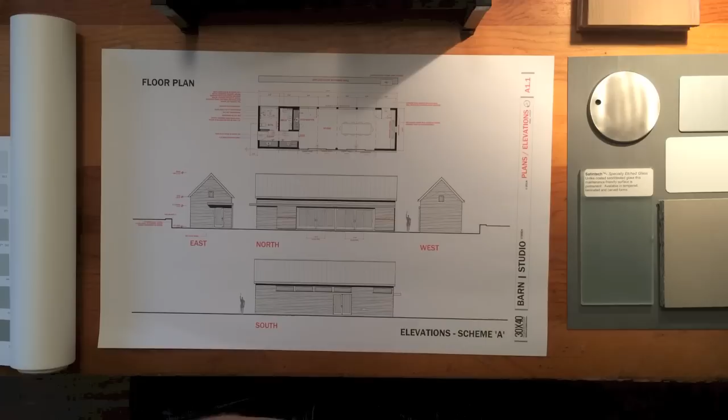The first stage of the design process, we set about designing the floor plan - you can look back at the previous video for details on that. We've essentially settled on a floor plan they're pretty happy with. There are some minor plan tweaks that have happened; we flipped it end for end. This is part of the normal back and forth process, working with the client, giving them information, they react to it, and we go ahead and revise the floor plans.

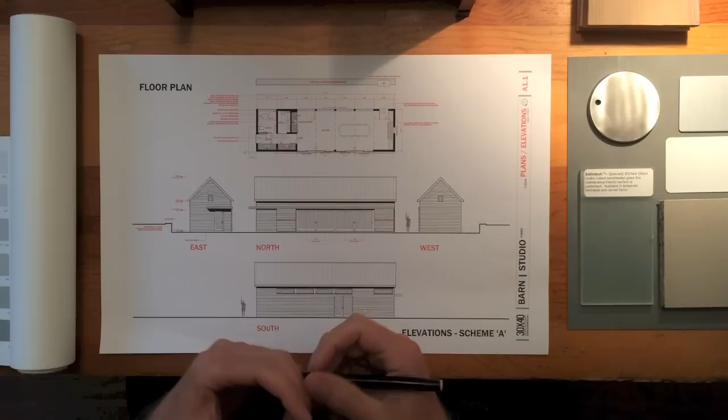The next step, even when we're initially designing the floor plan, we have some sense for what the building looks like. We knew it wanted to be a simple shape, and we also wanted some suggestion of the more modern interior on the exterior. We've developed this flat roof canopy as a way of expressing some of the more modern tendencies of the inside on the exterior shell of the building. We can't be too overt about it because there are bylaws in this subdivision that prevent us from using flat roofs as a major gesture on the exterior.

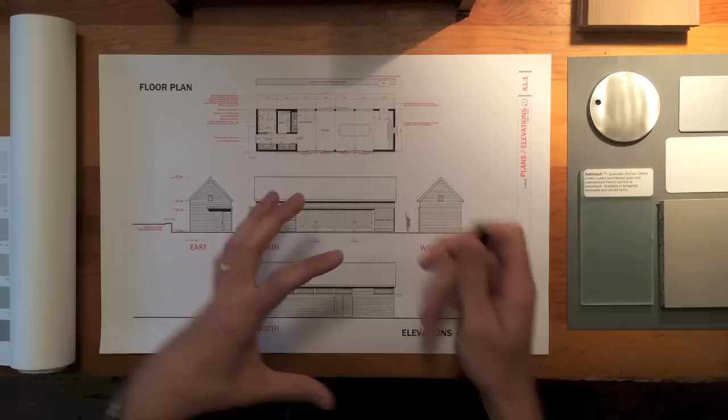One of the things we do once the floor plan is set - we know in general where the spaces are, what their relationship is to the landscape and the sun patterns. This is the northern side of the building, this is the southern side, and we know how the sun is moving, and generally how the client wants to use the site. Once we know those factors, we can really start figuring out what the exterior of the building is going to look like.

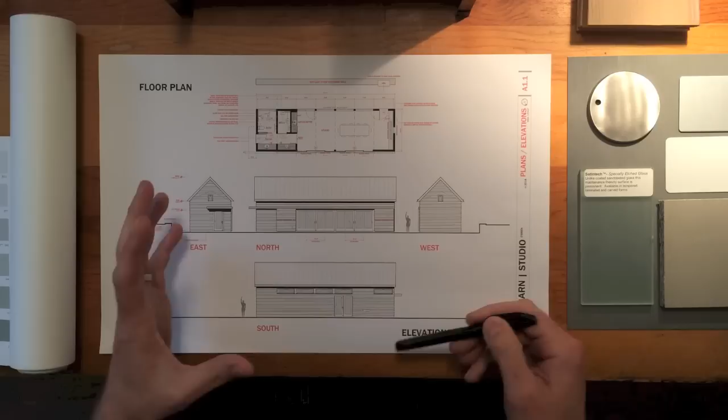When we design the elevations, which is what you're looking at here, we really start thinking about what the openings are. In order to do that, we think about what spaces they're serving. The big gesture in this floor plan is obviously the studio - it makes up the bulk of the floor plan, and has a very public relationship both to the entry area of their house and to the site, linking the interior of the studio to the exterior space. So obviously that's where our big gesture wants to be.

There are a couple of things to consider here. Obviously we have to be thinking carefully about the budget. Every project has a budget, and when we talk about big openings - if I can just sketch this big opening here for you - this is about a 50-foot building, just to give you some idea, and the eave height, which is this point here, is about 10 feet. You can see our little scale person here. That 10-foot spot sets the eave height, which sets the height of the building in general, the proportions of the building. You can see this big opening here, if we just sort of color that in.

That's very barn-like, and that's part of what we're working with here - this is the design aesthetic we're working with. Now, when we think about those big openings, everyone always wants to be able to open this space wide up. When we're designing these big industrial type spaces, it's a studio space, you want to be able to move your tables and chairs and have a clean flow between interior and exterior of the space. The problem with that is these size doors - if this is a 12-foot opening, from here to here, that's a 24-foot overall opening.

That's a large door, and a lift slide door that could accommodate that opening is about $1,000 per lineal foot—that's about $24,000 worth of doors in this one wall alone. So we have to think about how to make this feel open, feel connected to the landscape, but not spend $24,000 doing it. That's the challenge with this main elevation.

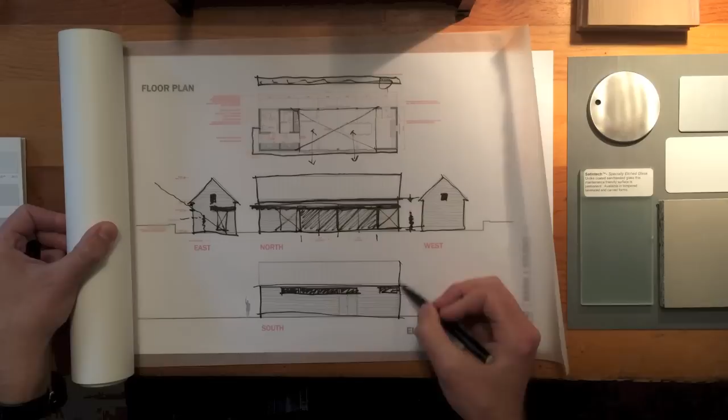In general, we presented the client with 5 different options. I'm showing you 2 here because I think these are the 2 strongest ones.

The large sliding doors we talked about in the beginning of the video—in this particular configuration, we've opted for a French slider where the middle 2 panels slide to the side, and the overall opening is 12 feet. When you open the 2 sliders, you're left with roughly 6 feet, so half of that opening. So you have a large 6-foot opening here and a large 6-foot opening here.

Now that's not quite a barn feel, so we wanted to explore what it would take to get more barn, a much larger opening there. This option looks at doing that. We went to a different door manufacturer.

These are actually commercial door frames, adapted for residential use, but essentially the frame comes knocked down—they call it KD. The frame is assembled in the field. The sashes are shipped fully glazed, and you pop the sashes into the frame you assemble on site. This saves some money—it's more of a commercial system, and thus we can get larger openings.

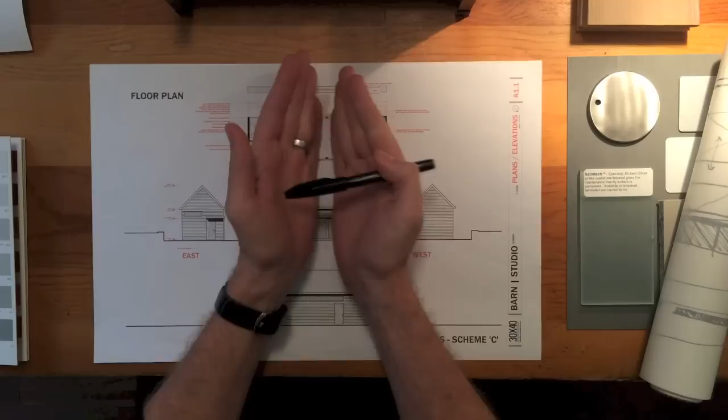In this particular one, you can see this line indicates that this entire 6-foot side and this entire 6-foot side of this opening are stationed in the center so they'll both slide to the side. That leaves us with a full 12-foot wide opening, or the perception of one. Of course, we have some structure in the middle of that, but to us this is a much more barn-like feel. Opening the center of this space up really allows you to move more freely in and out of this space.

And then we started looking at some of the other spaces—we have a mechanical space here, a bath space. The bath is in general a private space, again sitting on the south side. It made sense to locate a clerestory window up high in that space, and we actually tucked one around the corner here as well.

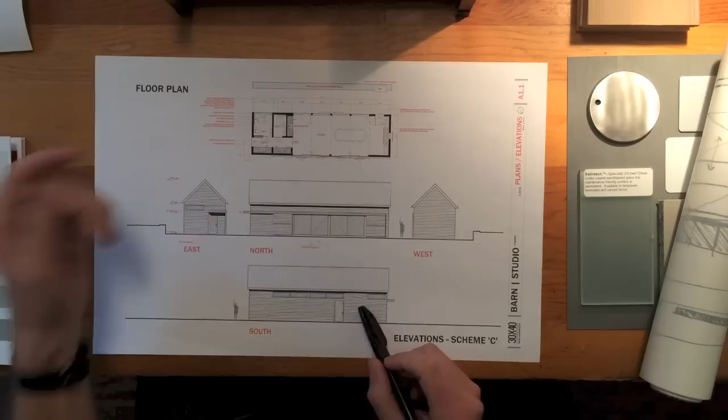And we'll solicit the client's feedback and figure out what they want to do about that.

The last thing to mention in this scheme is this solid door that leads out to a cooking area, and you can see the grill. We've got different options for where this door could be in this wall. Does the grill fall here, or here? It should be related to that door. When we put the door more in the center of the plan, it allows a stronger relationship to the interior kitchenette and more direct access to the grill area—it just made sense.

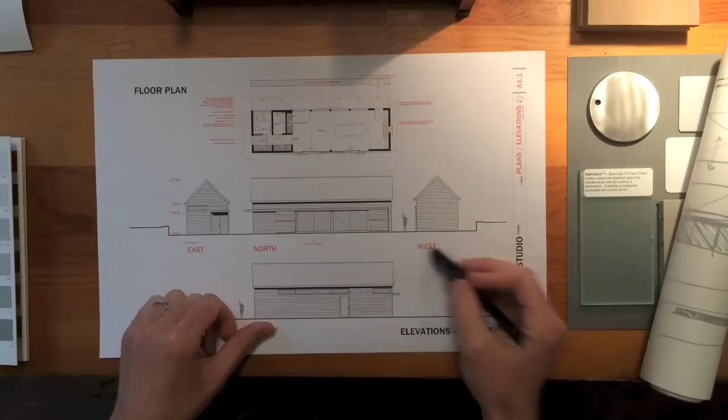In this case, it's solid, so that this whole north face is a more solid piece. The south face is completely open, and yet on the north face we still allow some light in from above. This face has no windows in this particular scheme. The previous one, remember, has a small window. This faces the street side.

We really wanted to go with a real austere face, like a shed piece, and then as you arrive to the site and come in, you sense, oh wow, this is actually a fairly large open studio space.

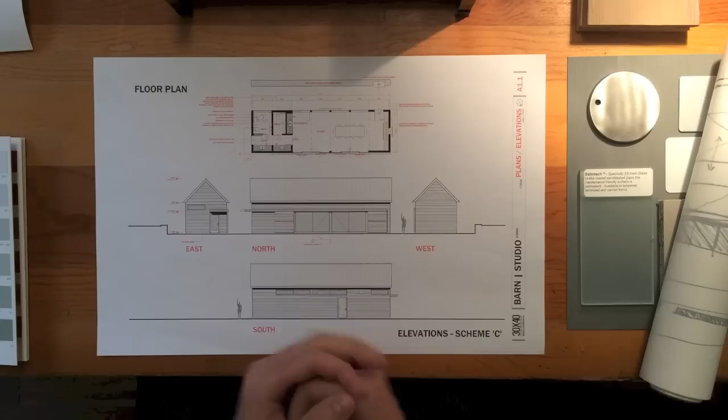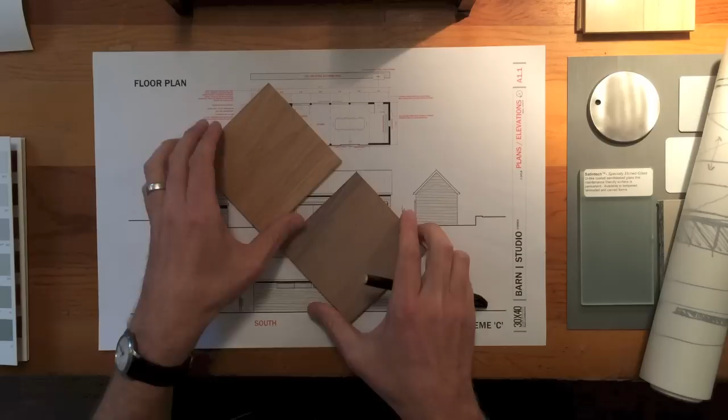The sliding panels is the last thing I'll mention here. They stack to completely conceal this, so when the building's not in use, you end up with a screened face. Depending on how we design and build these panels, they can be slats so they provide some screen. If we put a space between these boards, they can provide a sunscreen on the south face and modulate the amount of light coming into this space, as well as make it look like a completely closed building when totally closed.

So that's the evolution of this piece. The one last thing I want to mention is a proportional game we played, and it's a dialogue we're continuing to have with the client.

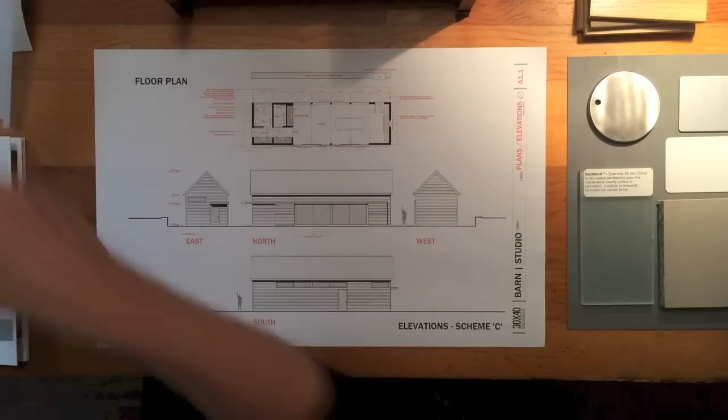One of the things they requested was they didn't like the idea of having a 7-foot door. They felt it felt cheap, lower quality for their home, and their main house has all 8-foot doors. Here's where I fell on that. Remember, this is the 10-foot eave line, and this is the 0-foot lower level plan line.

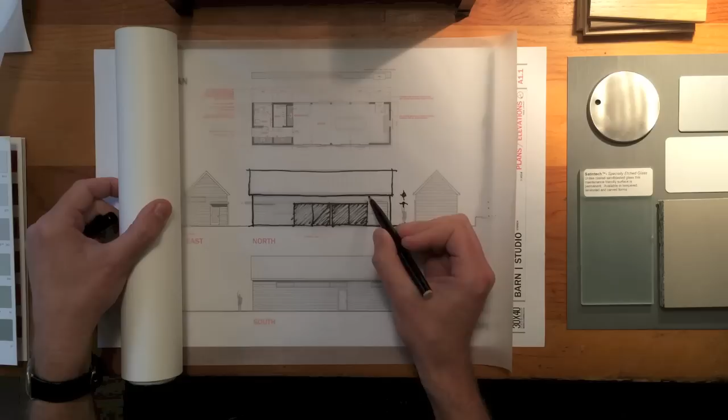I recommended against that, for this reason. These doors here are shown at 7 feet—these are our big monumental sliders that move out of the way to create that real barn-like feeling. When it's 7 feet, notice the amount of wall we have above it—still 3 feet of wall above it. This tricks the eye into thinking the structure is actually taller and larger than it really is.

If we were to move this point closer to the eave—let me sketch that out—we have our 10-foot eave here, and this is our roof plane. If we stretch these doors up closer to the eave line, say 8, 8.5, or 9 feet, not only is this a strange proportion for this sliding door configuration, they'd get a lot more expensive, but it actually makes the structure feel squatter. It doesn't make it feel taller.

And inside will be the same perception. As long as this point is above your eye level and you sense some height of wall above that, it will fool your mind into thinking this space is actually a lot taller than it really is. The closer this line comes to the eave line, the lower it will actually appear. So we've saved quite a bit of money by using a standard 7-foot tall frame rather than an 8-foot or taller frame. We've also created a more barn-like proportion in this wall, and it just feels better. The ratio of solid to void feels better to me, and we'll see what the client thinks—I think they will agree.

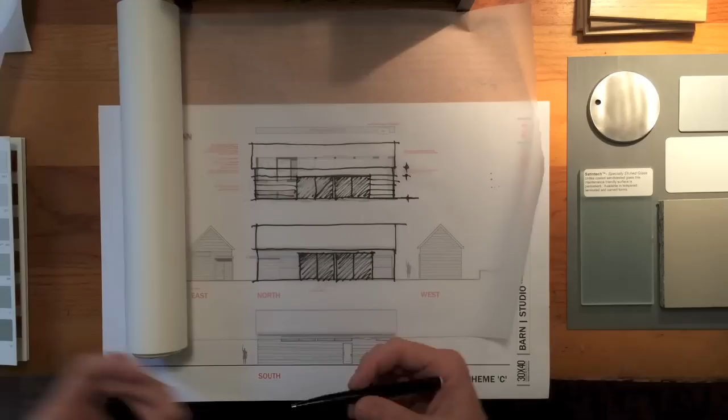Now the next level of decision comes into figuring out how we're going to clad this, and we have some ideas about that. The next video will go into how we select materials, because that's the second layer of designing the exterior elevations. All right, thanks for watching.